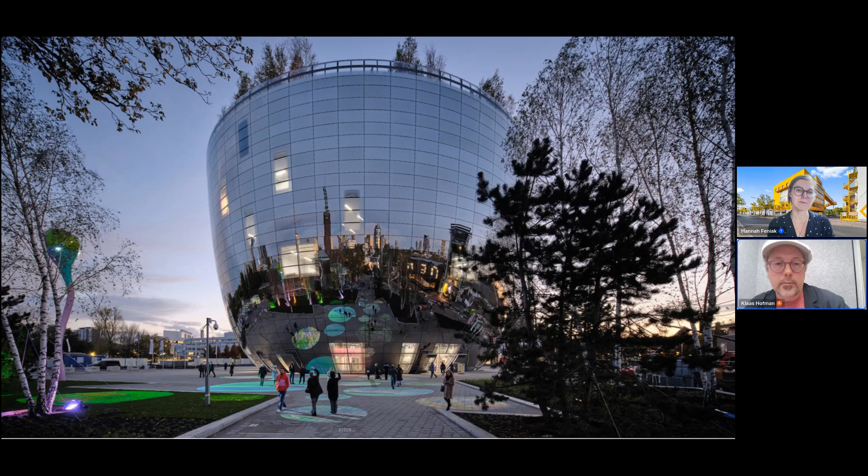We are quite well known, I would say, for our strong conceptual architectural projects, like this one, the Hanover Pavilion in Germany, the Market Hall in Rotterdam, the Depot, and Museum Boijmans Van Beuningen, a special type of museum that reinvents the typology of the museum, opening up its archive rather than its front of house. And Valley, a mixed-use building, bringing new life to a mostly monofunctional business district in Amsterdam.

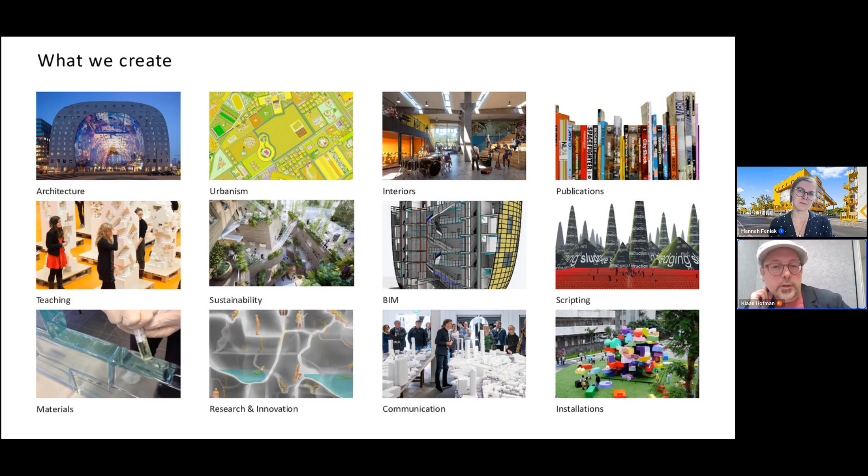But next to that, we do a lot of other things. We do a lot of urban projects, interior projects. We have a special interior team, and we do a lot of teaching and research, and have a lot of publications about that. And also, maybe not known to everybody, we more and more work with transformation of existing conditions. I would say it's been in the DNA of MVRDV since the beginning, since we started.

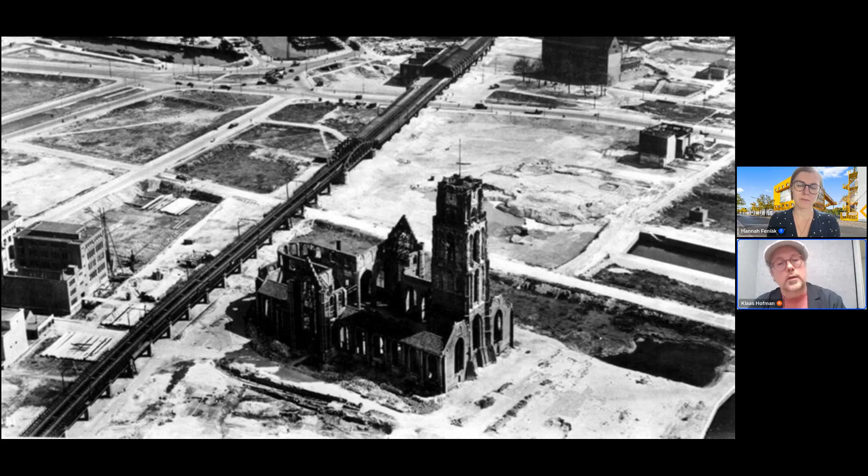Also because we're based in Rotterdam. This is an image of Rotterdam just after the war, which was completely flattened out by the bombings and the fire. So we know in Rotterdam the value of history, and the value of what you miss if you don't have this kind of historic sense of architecture in your center. And you appreciate somehow the value of monumentality of later periods. So we value our buildings from the 50s and the 60s, because that's how far our history goes back in terms of architecture. You can see it also in our office where we are housed.

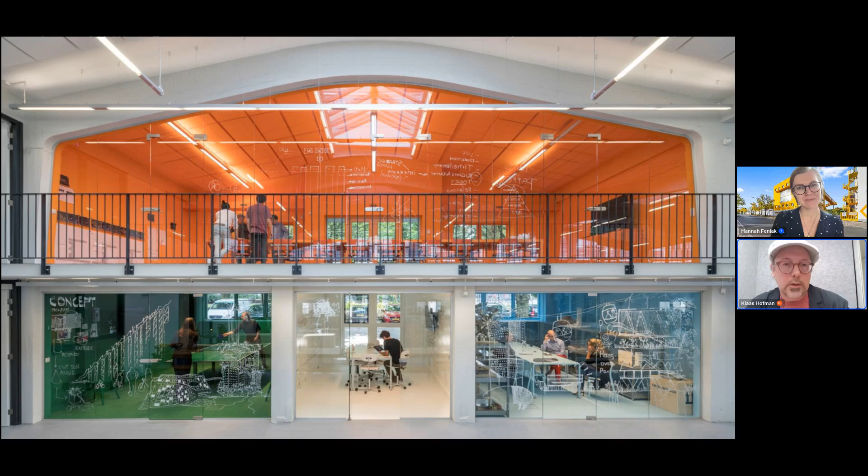This is one of those post-war buildings in Rotterdam that we have transformed into our own MVRDV house, customizing it and giving it a new identity that really fits us, but also strengthens somehow the quality of the building.

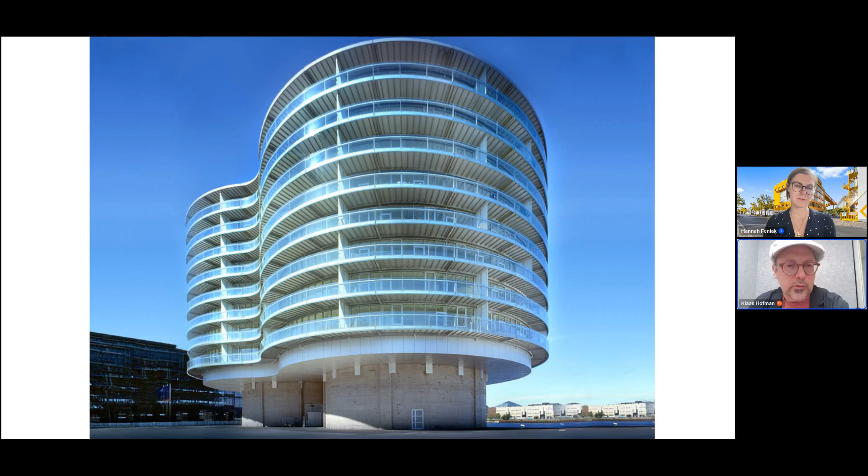We have transformed this monumental building into a hotel in Amsterdam. These silos have turned into beautiful apartments around the silos rather than inside, in Copenhagen. This is an addition to a family house in Rotterdam, building a new extension quite bluntly and with a lot of color on top.

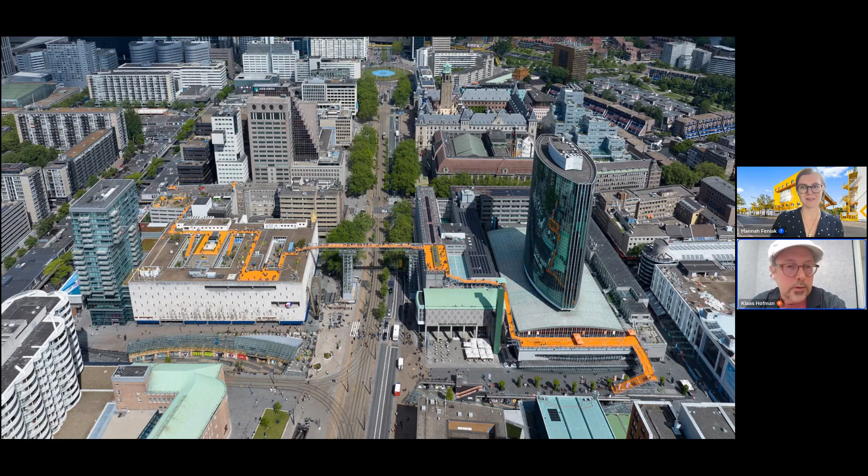And a few years later, we did a similar intervention somewhere else in Rotterdam, giving access to the roof with this designed pathway, and giving a completely new perspective on the city as we know it.

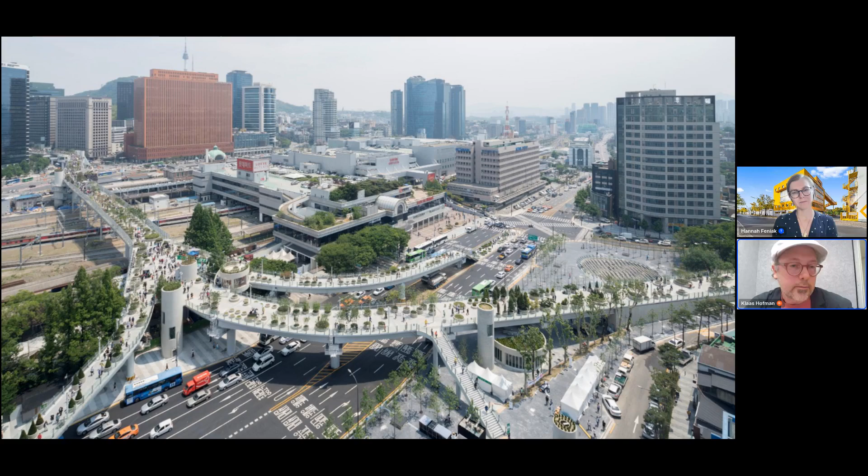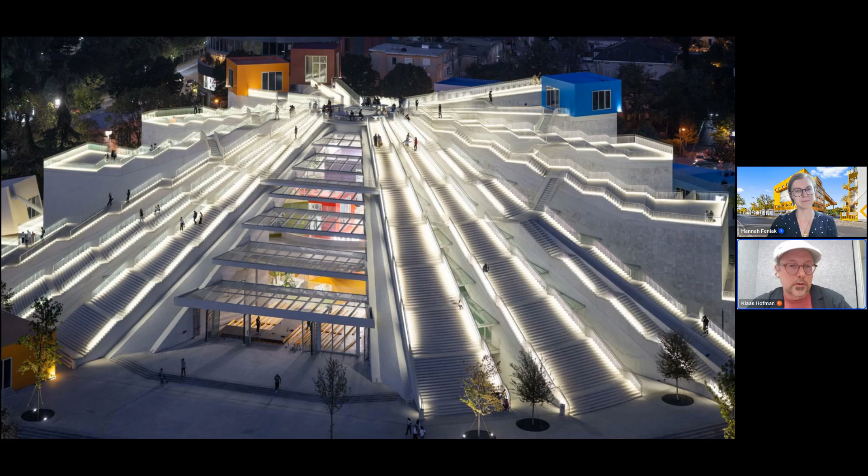We added new buildings in concrete factories, respecting the existing conditions there, but at the same time bringing new life. We transformed a highway in Seoul into a park, and the shopping mall turned into a beautiful public space. And a former communist monument in Tirana became a public educational facility which everybody was allowed to use and occupy again. And then I end up with Atelier Gardens.

As I said, many things come together here. We were invited by a client that wanted to transform a former film studio complex into a new campus for activists, to create a new community for institutions that are working to improve conditions in any field in the world. That sounds very vague. It has been quite a challenge to understand at one point what exactly the goal and the type of people and atmosphere they were looking for. But that was part of the whole process of a first urban regeneration investigation that we did.

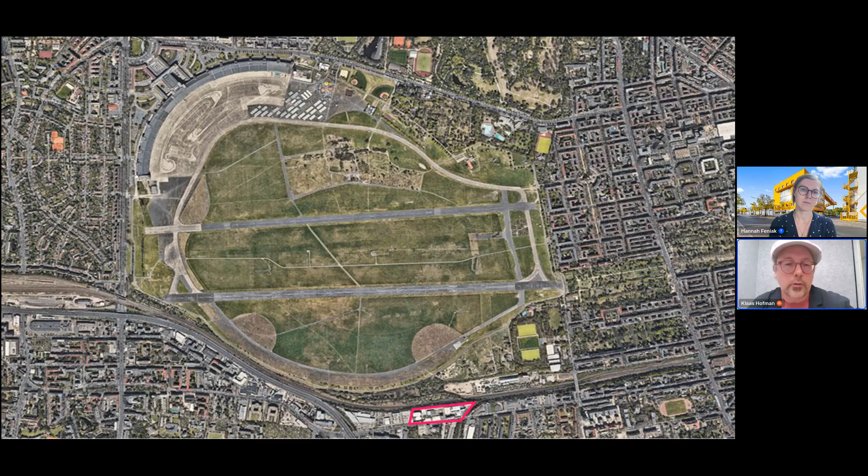You can see the site here below. When we started, the site was looking like this, quite a diverse collection of buildings. The brick buildings you see are very beautiful historic film studio buildings made out of brick. They are heritage protected, but there are many other buildings in between that had different qualities, and some of them were even quite ugly, I must say. You can see almost all of the site was paved, with so much paving and so many parked cars and vans needed for the operations of the film rental business. But transforming the uses of this site also allowed us to reconsider the use of the public space.

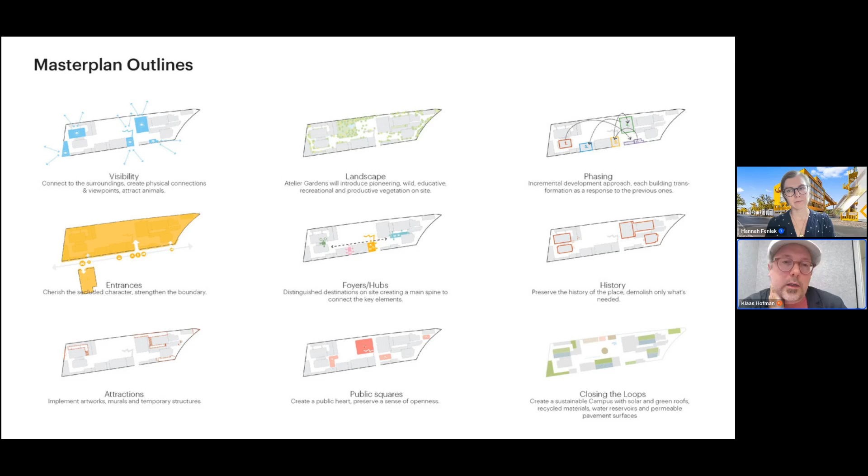We let a landscape designer hired afterwards, Harris Bugg from the UK, do a great job following the concept of step-by-step development and introducing rewilding ideas for all types of landscape that would creep into this campus, working with what's there, using materials that were available or would become available during the transformations to build a new landscape.

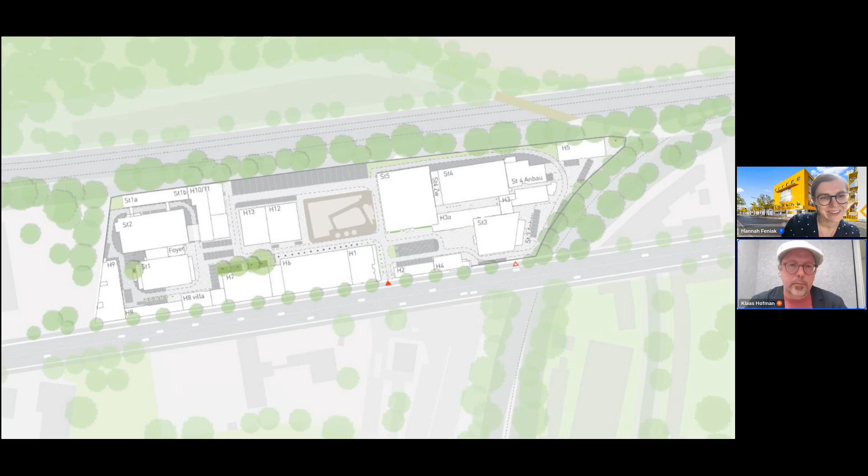So what we basically did here is transform this existing plan into a quite diverse and green landscape in which different types of buildings of different sizes and beauties would remain and get a new function. And this could all be developed step by step.

The client was able to pick which building they would be interested in developing first, then wait to see how that would go before moving on to the next one. And the public space would follow that idea.

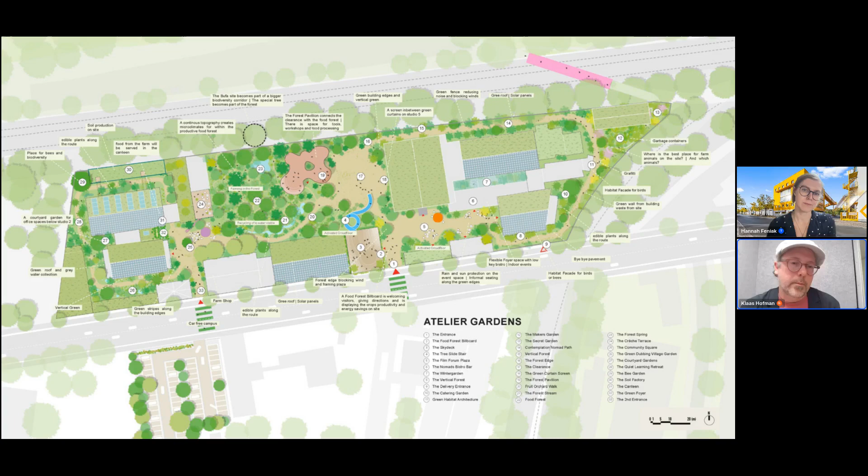So this, in our vision, would transform into something like this, which is still very diverse. It's more diverse, more green, also more colorful, as we always like to use color as an element of information, and maybe, to use your words, Hannah, joy.

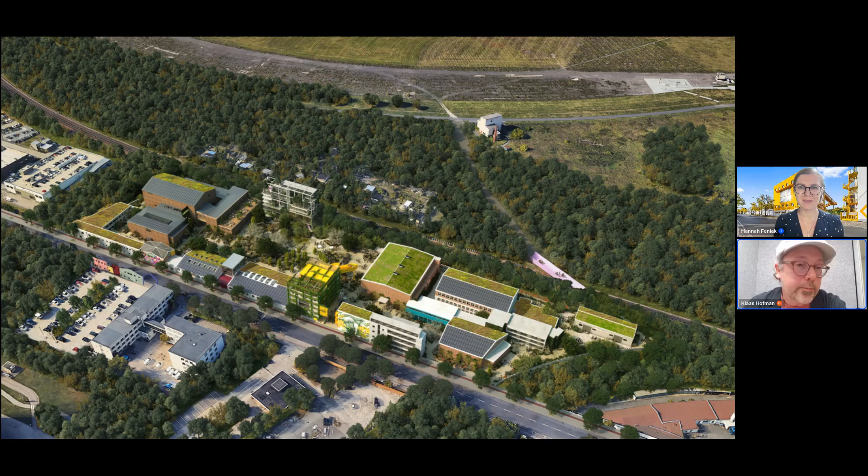This is one of the photos from already 2 years ago. I can never give you a final end result because the project is still ongoing - there might still be a new project popping up sooner or later. But here you can see what has already happened and what kind of dramatic transformation has been achieved in those 2-3 years since we started working on it.

To give this kind of freedom of development, and also this kind of chaos of scale and program, some structure, one of the principles for the entire master plan was to give the communal entrance points that already existed between the film studios - the colored blocks right here - a clearly recognizable identity in terms of color. So those would inform the color scheme of the surroundings, making it easy for people to navigate throughout the site to these different areas, each with their own types of users.

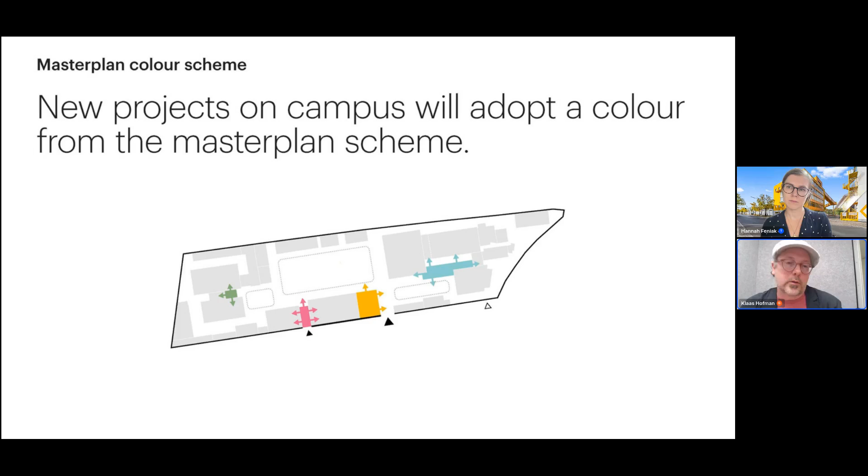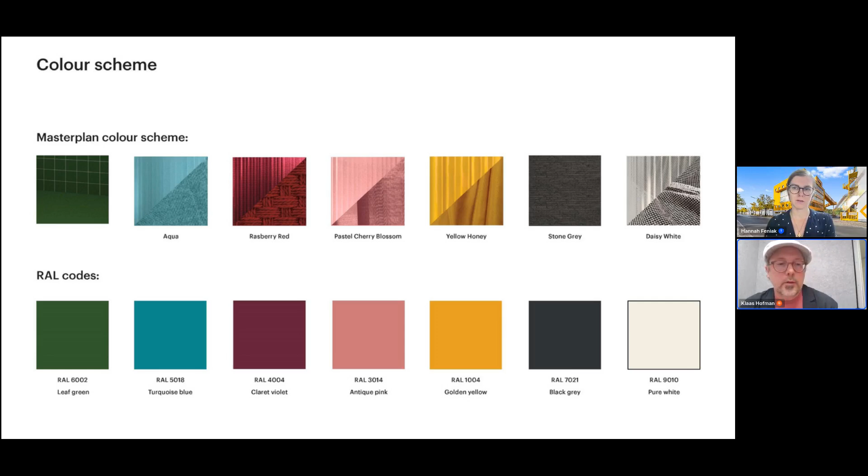And this color scheme - I'm going through it quite quickly and superficially - has been developed over time to reflect its quality for readability, but still have some connection to nature, to natural aspects.

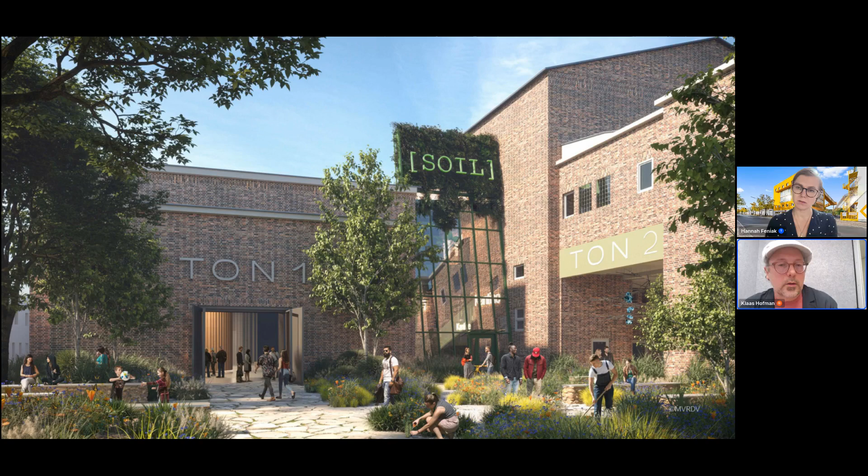This is a picture of the existing situation at the Ton 1 and Ton 2 corner, with this glass addition done in the 90s I believe, and our impression of what the transformation could achieve, including the transformation of the landscape, marking this kind of green entrance. I will talk about Ton 1 soon after, about what we did there.

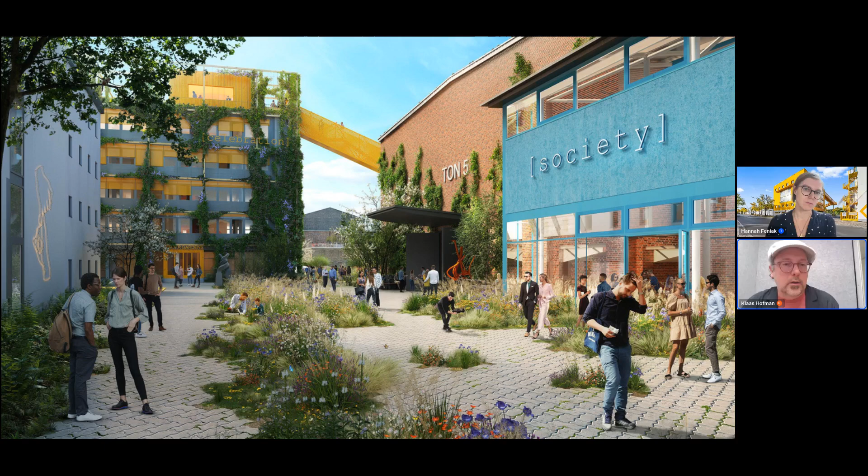That's the other side of the campus, with a lot of parking and a lot of pavement. You see house 1 here on the left, which we later transformed into the yellow house. So quite anonymous everything, and our vision for what it could look like in the end.

This is one of the projects, one of those other entrance buildings, that has not been realized yet - one of those examples of projects still in the pipeline that might still pop up one day, or if they're not needed anymore, maybe they will never happen. But we had a whole variety of mini projects in the pipeline to help the client achieve their goals.

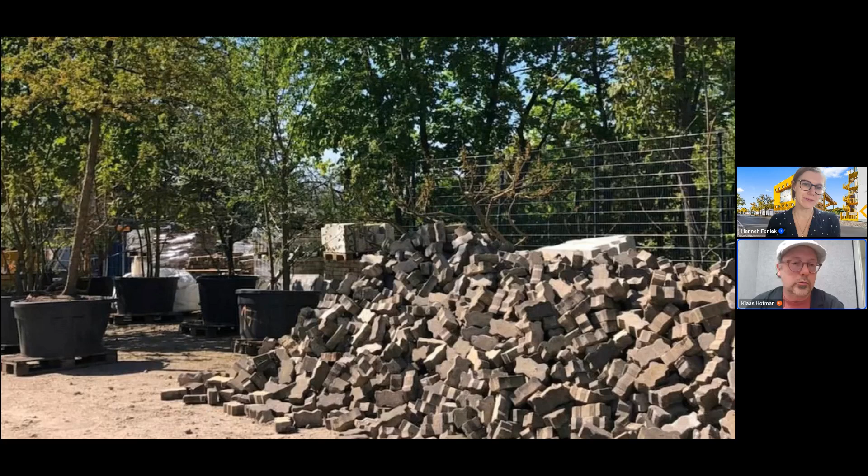Some pictures from soon after finishing this master planning phase show how the transformation quickly started before we began any of the architectural interventions. All the pavement that could be removed was soon piled up. This pavement is being pulverized and reused in the landscape as gravel or substrate for incoming plants. Some of the trees you see are already waiting to be planted.

Some more pictures - I don't have pictures of what it looks like now. I think this one is from 1 year ago, so I'm quite curious to see what it will look like next summer. Every year, nature will be more and more present.

At the same time, during this whole transformation, the operations of the campus and of Atelier Gardens continued as well. They are very active in programming spaces around the campus, organizing outdoor events, showing outdoor movies, organizing festivals, renting spaces out for commercials and filming, since filming is still one of the things happening on site in that studio building over there, Ton 5.

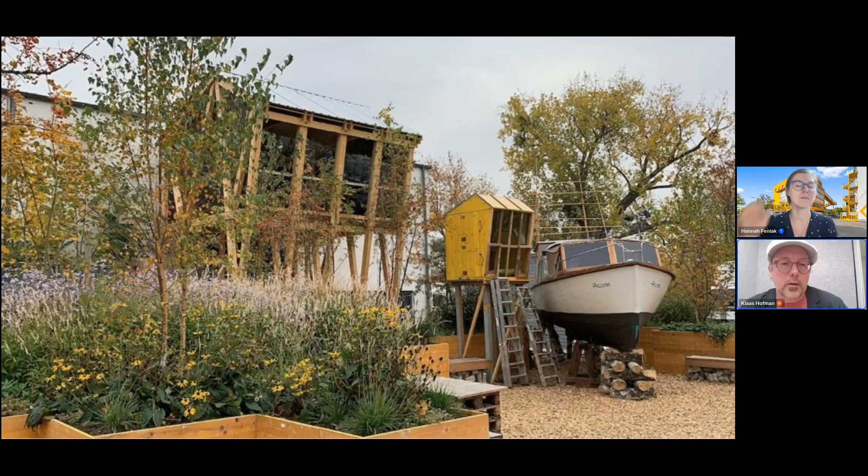Then I move on to—how am I doing on time?—the transformation of Ton 1. That's the first project, the first assignment where we could test our ideas on one of those monumental buildings.

We couldn't touch any of the exterior or any of the monumental value of the structure itself, but the client wished to be able to reuse that space in a much more flexible way, renting it out for different types of events, being more flexible in the types of tenants they could use.

The building was not suitable anymore for filming as a location, because the other Ton 5 was much bigger and much more equipped to do so. So we were kind of free to fill in potential uses for this building.

That led us to conclude quite quickly that we needed to separate this project into two main focus points. One important project is the renovation and restoration of this existing building, including redoing the installations, redoing the floor, all the things that were damaged and not functional anymore.

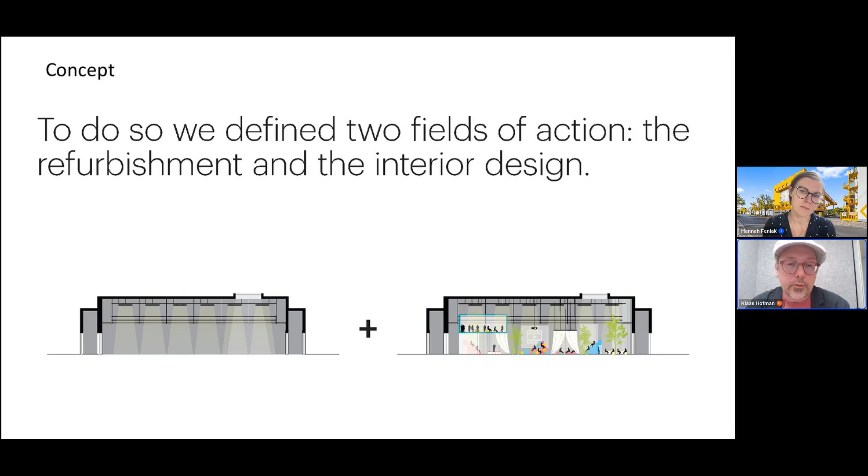But doing all of that in an invisible way, respecting the characteristics of the building as it was, and at the same time thinking about a way to occupy the space so that it would add something new, something useful and functional, that will allow the space to transform without touching the building.

So for this first project, we worked really closely with our local partner, HS Architects, Harold Hirschmüller-Schindler in Berlin. They helped us a lot on the technical work and on the monumental aspects.

And we broke the building down, so to speak, into these different ingredients. Each of those ingredients would get a proper investigation, and then a solution on how to deal with the restoration of it.

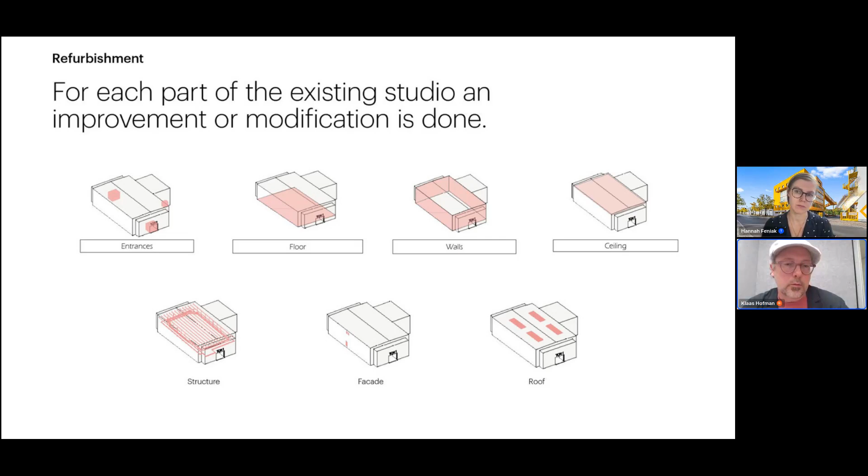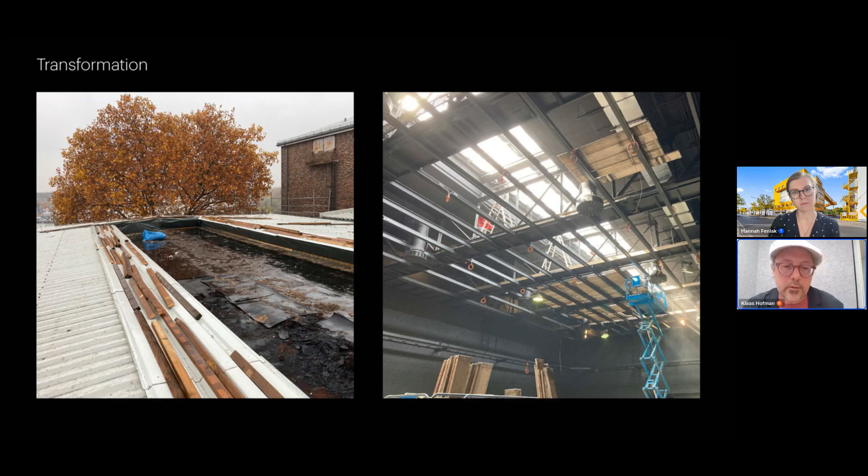It's quite an important thing now to also add daylight for the possible uses inside, not being limited only to the black box.

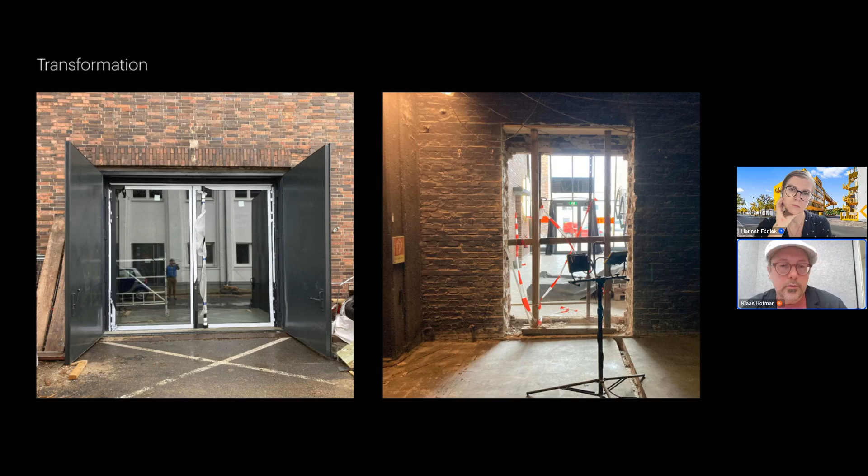We placed in new doors, as transparent as possible, and placed mirrors inside the entrance box so that daylight would be able to reflect even deeper into this space. We renewed the floor, but as you can see, most of the rest of the walls stayed intact and stayed raw and rough as we found it.

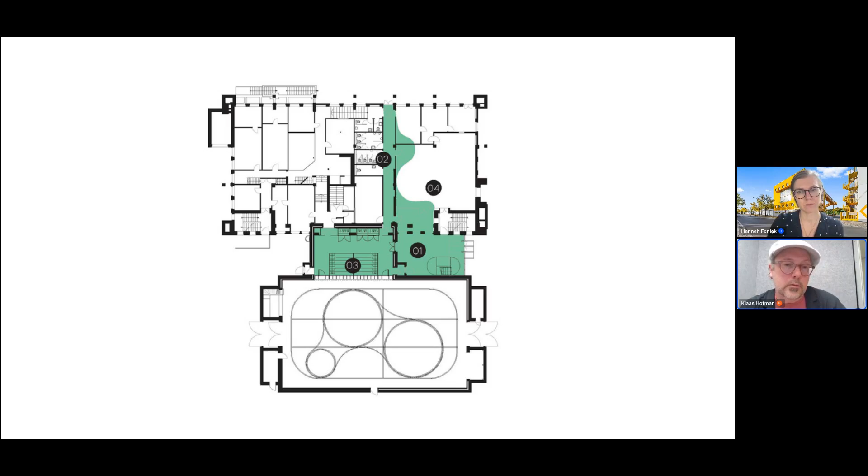Then, to anticipate the potential uses of this space, we also had to think about the facilities that would be needed—additional spaces next to it that could be transformed, like toilets, the canteen, the wardrobe and storage, etc.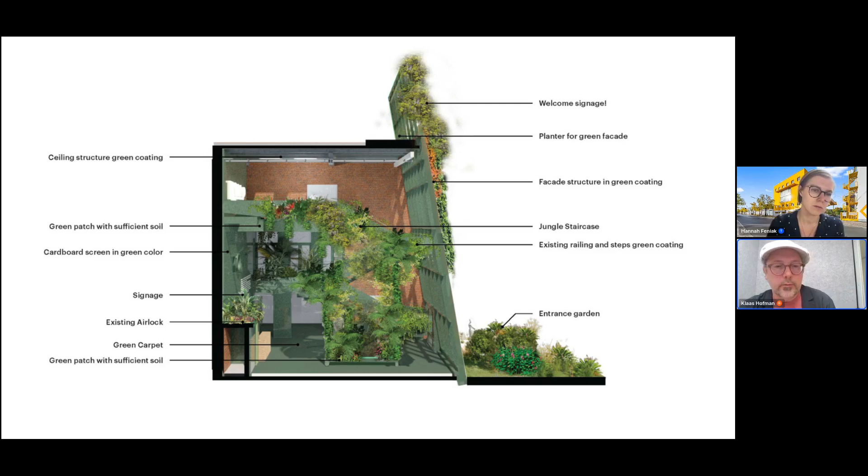And this was done in this green area, and this is then the extension of that idea of turning this entrance marker into a kind of information meeting point, using that color also to mark the communal spaces that would facilitate the studio building.

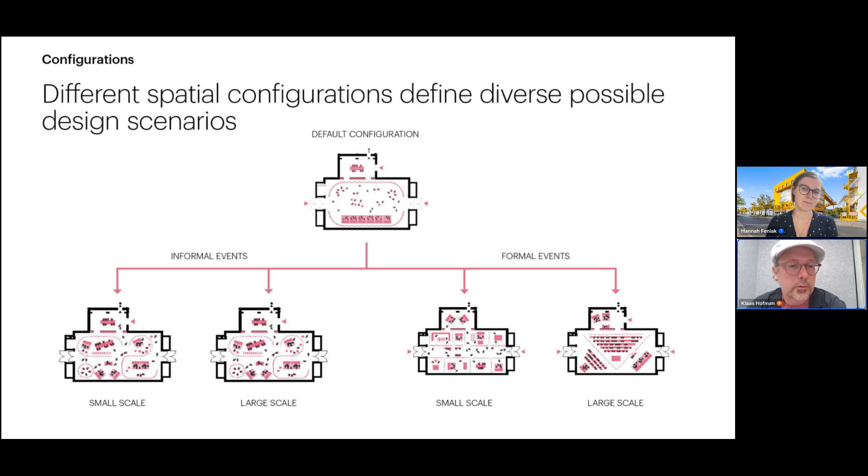Moving on to what to do with the building—a flexible concept for different uses of this film studio space—we came up with the idea to design a massive rail structure that would hang in the space as a proud, visible element, not something purely functional hidden somewhere in the ceiling, but more like a spaceship.

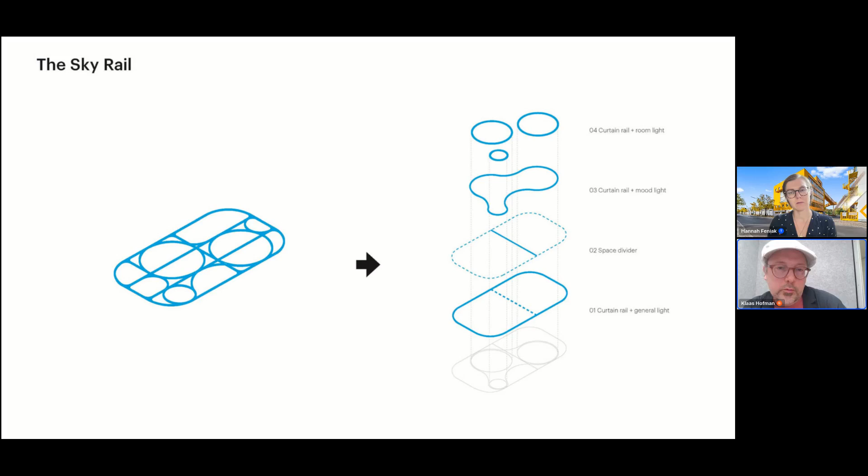It would be multifunctional, also integrating light and multiple trajectories where curtains would then be able to divide the space in many different ways.

These are some of the renders we used to convince the client of this idea. You can see the blue rail system with all the curtains in different colors, able to make different rooms in different colors, parked on the sides.

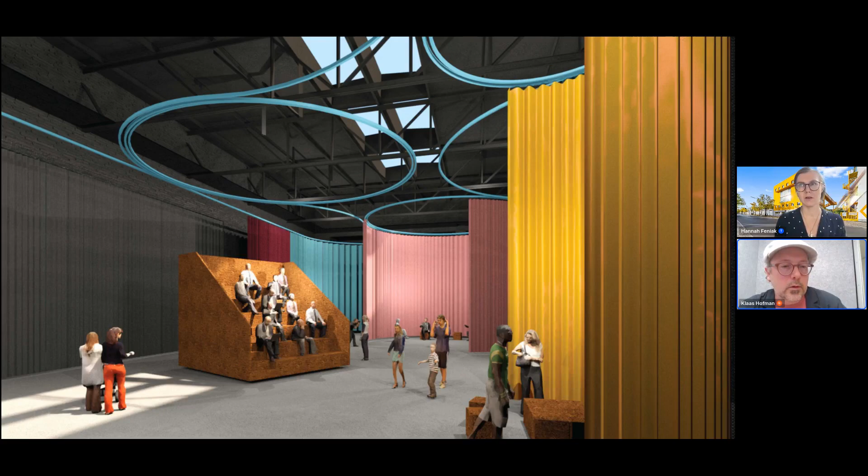So you can use the big space in its most bare form, but as soon as you start to move the curtains, you're free to divide the space any way you want—into smaller spaces, with multiple uses at the same time, because some of the curtains are also fully acoustic.

Using the additional green space next to it to make the space bigger, introducing these kind of tribunes and moving furniture to be able to have audiences move around.

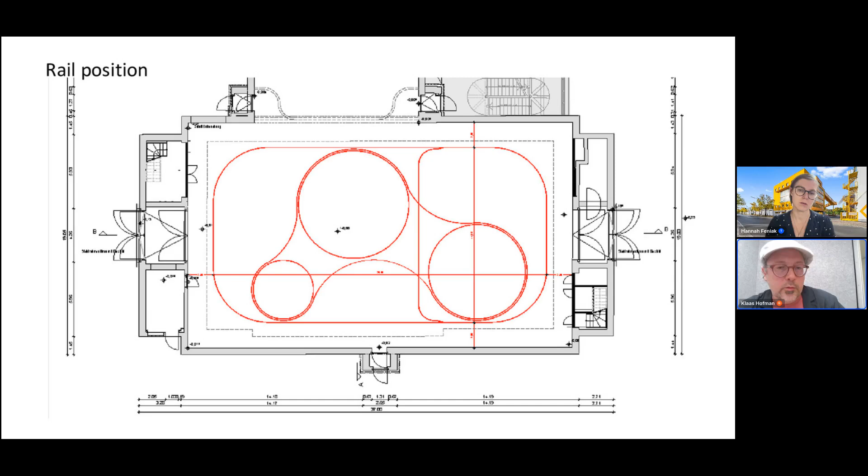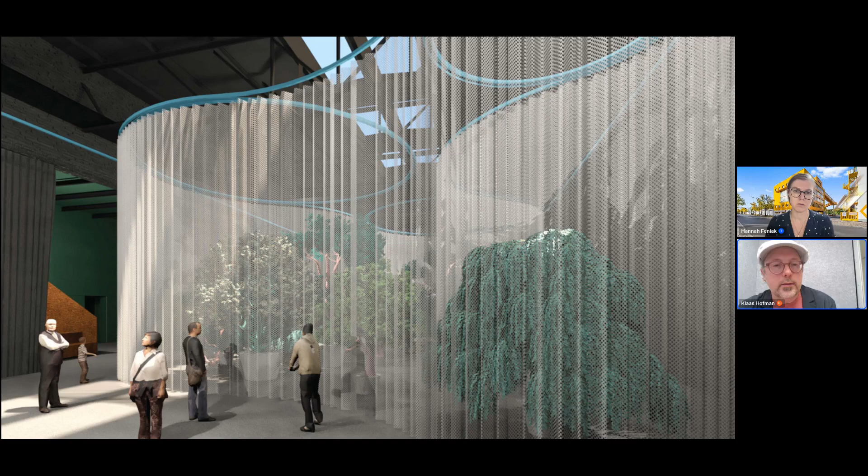And the curtains, as you can see, each would have a different property, from being very thick and with the best acoustic value to being very transparent and lightweight, to not close off too much.

And these are the photos. This is a picture of the rail with the light and the skylight above, and the beauty of this kind of minimum intervention that allows so many different atmospheres inside. The different textures and fabrics that we used, and every day a possible different intervention that would fit the type of events.

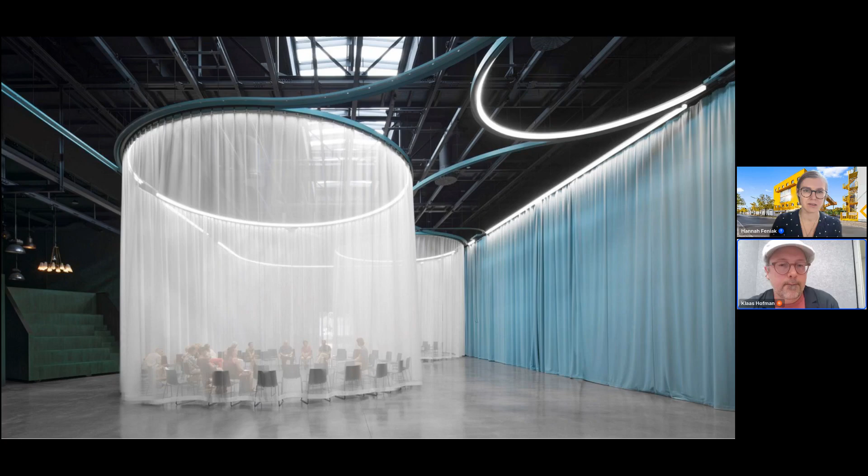The client wanted to rent this out as office space, but it would not apply for proper use anymore, because the facade was an issue, the climate system was not good enough, and the building was overheated in the summer. It was completely filled in with office cells and ugly lowered ceilings, and it needed a complete makeover.

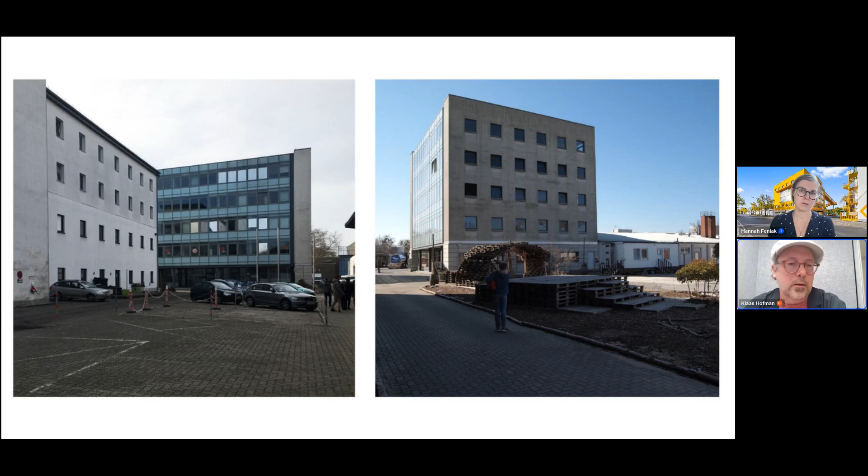So again, we investigated all the different ingredients of the building and different parts that would be able to improve those different aspects. The facades on south and west would somehow need to improve the overheating, and the roof, by the way.

Some of the facades really needed to build a new identity for this building, because at the same time it would be standing next to the main entrance, and the client was desiring some kind of iconic statement to invite people into the campus, which is quite enclosed. I didn't mention yet that there's a wall around the whole site, which is also one of its qualities, that it feels quite intimate once you step inside, but you need to make some effort to let people know that they can come in. So this building, that was one of the goals for this building, to be able to do that.

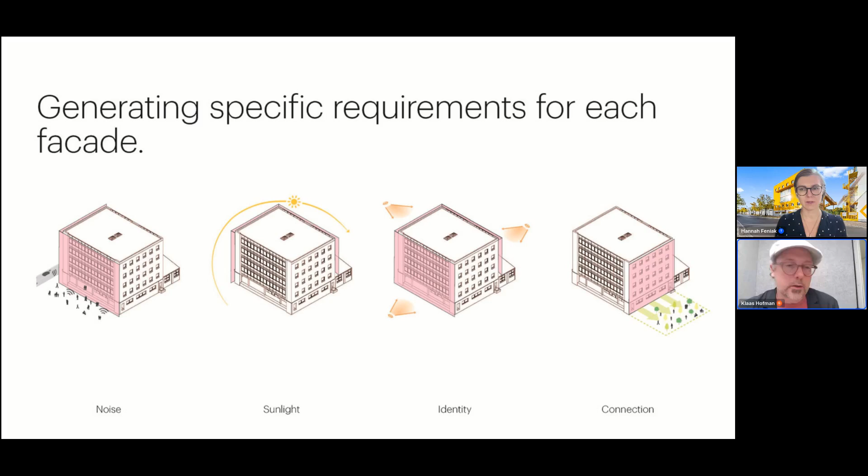At the same time, on the right, this building was also quite enclosed towards the interior of the campus, and the client wanted to have more public programming on the ground floor that would be able to open up to the future garden. So we came up with the idea to find a solution for all of these aspects in kind of local interventions in this building and on this building.

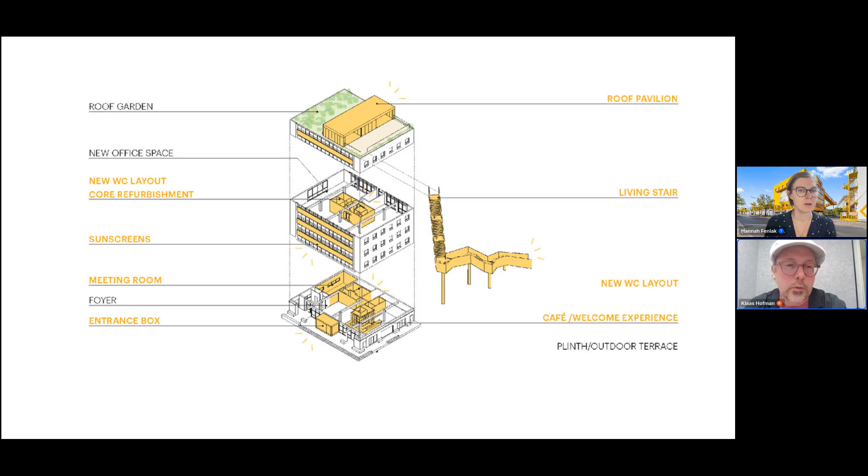And give all those new elements a yellow color, part of that color scheme I mentioned earlier. So a new core with a new elevator that would be able to go to the roof would all be yellow. The ground floor with the new meeting spaces and the cafe would be yellow, and a new rooftop pavilion to function as a kind of more public event space overlooking the whole Tempelhofer field and looking at the skyline of Berlin, as you will see later. And the roof garden, sitting in a roof garden, would insulate the roof.

And then, because of the amount of people that would be allowed on the roof, it required an extra fire escape. We came up with this idea of this quite expressive external staircase that would not just be a fire escape, but would function as a kind of public attraction point as well. I will come back to that later.

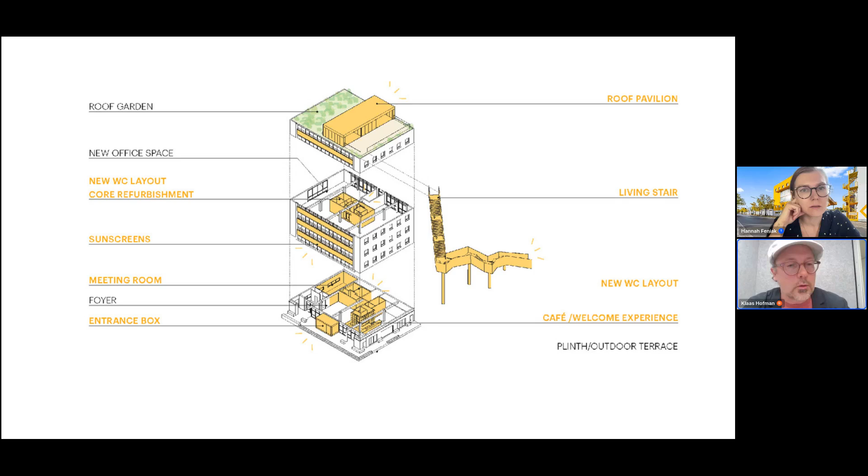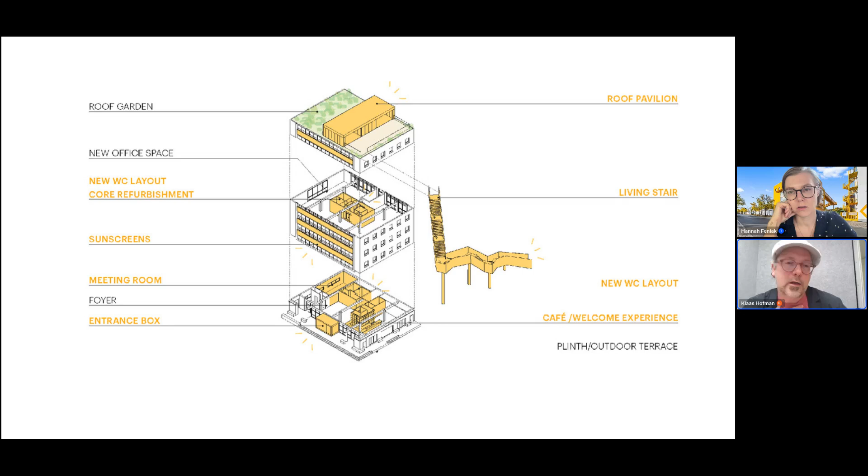This idea, I must be honest, of having quite a strong contrast between the existing building remaining as it is and giving a yellow color to all the new elements, was kind of doubted by the client—if that would be strong enough, or maybe the building would still look ugly. That led us, finally, quite shortly before construction, to decide that actually the whole building would be painted yellow.

Maybe that can be some of your comments, to see if you agree with that decision. So this is the result. It makes it quite uniform in that sense, so that's a good thing about it, I think.

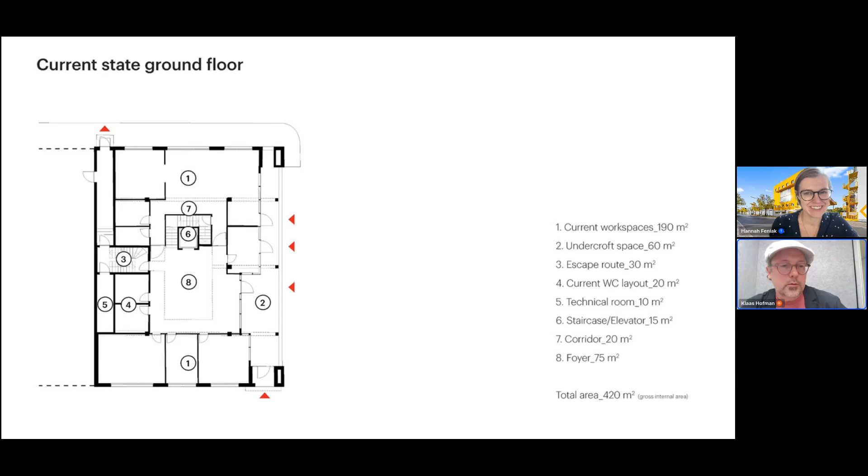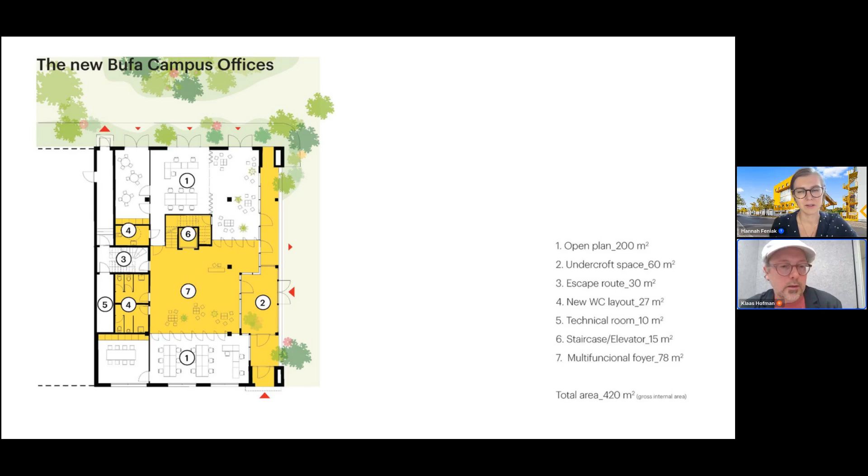This is the ground floor as it was, and our proposal was to strip everything away that was not functional or not needed anymore, and then give it a new purpose with new functions, in terms of a cafe and meetings, co-working spaces.

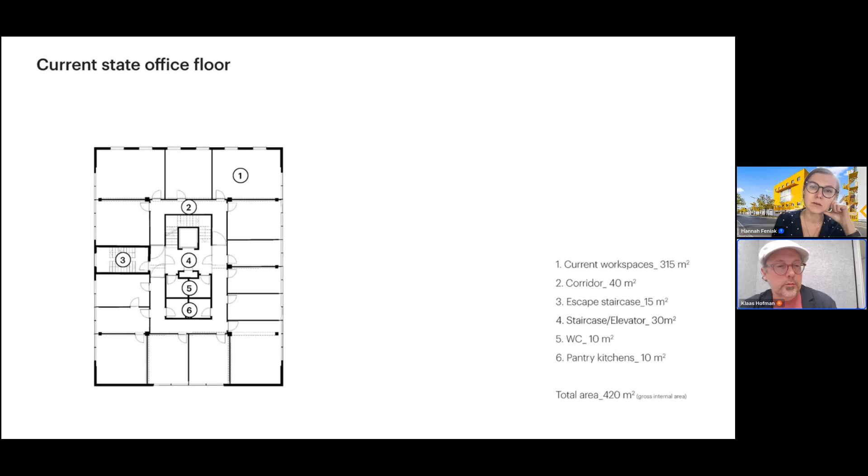upper office floors that used to look like this, stripping them out completely and giving the tenants the opportunity to decide how much square meters they would need and how they would want the space to be divided up.

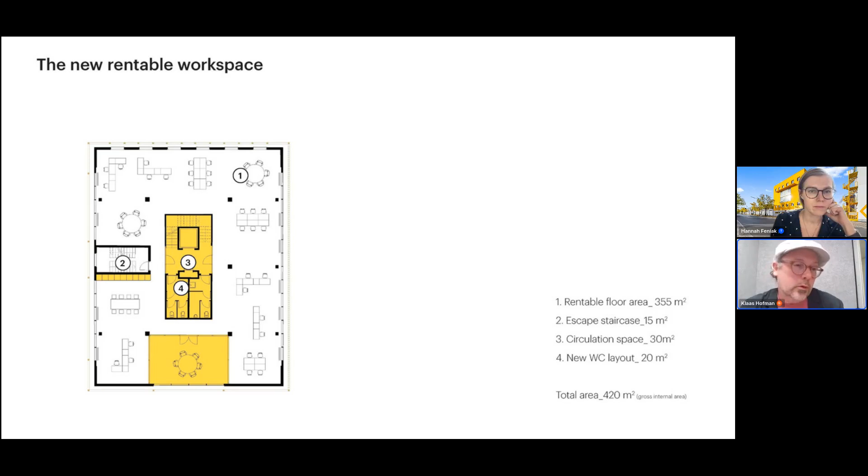And our local architect, HS Architect, for example, is one of the new tenants of this building. You can see them here.

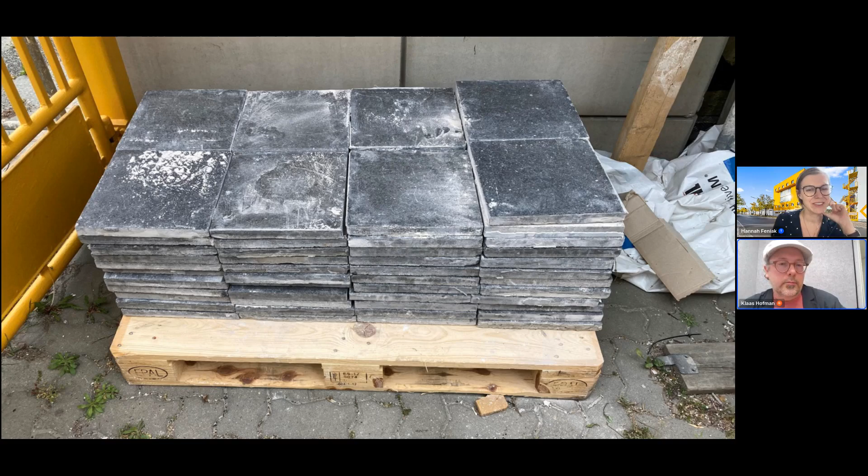All of the materials that somehow had to be removed from the building have been collected, labeled, and reused elsewhere on site. Some of these insulation materials have been used somewhere else. These tiles have been pulverized as well to be used in the landscape, etc.

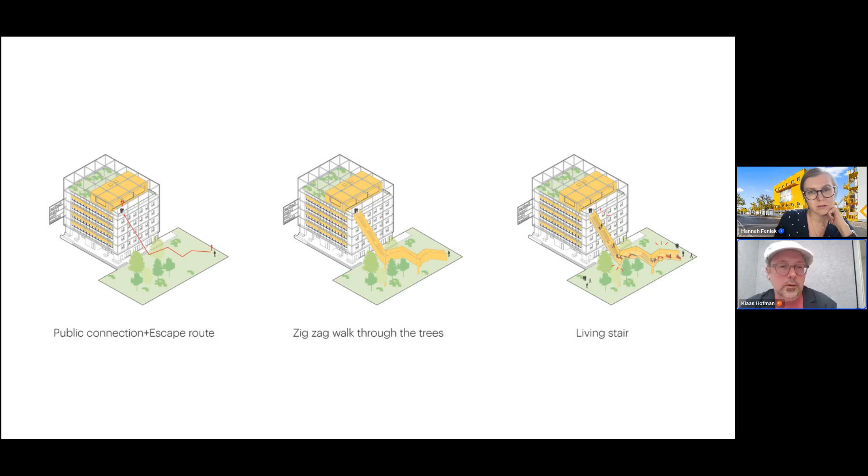And then I come to this additional idea - there's quite a modest transformation of the building itself, but since this is the highest building on site, we thought it was a missed opportunity to not somehow occupy or be able to access the rooftop. So it was not accessible before, and we convinced the client to let the public be able to enjoy this beautiful view. So we proposed this pavilion on top, sitting in this roof garden, and added this staircase.

This allowed the rooftop to become a public destination without interfering with the internal logistics of the building.

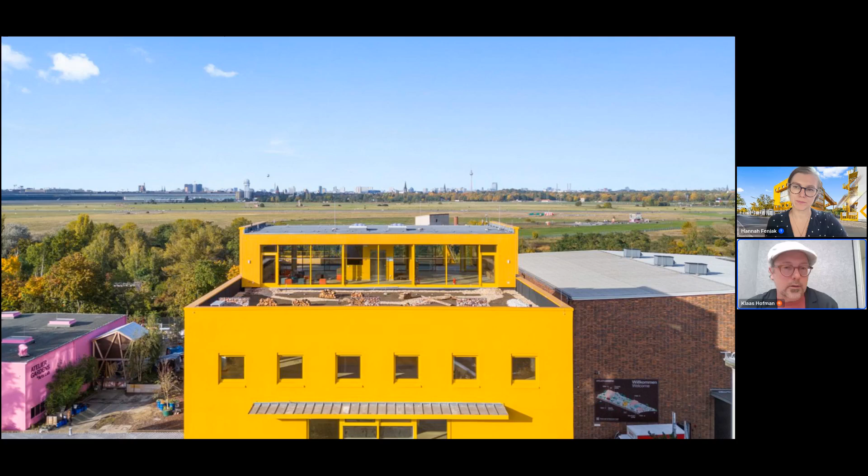The garden, of course, is not there yet, still has to grow, but I think it will be beautiful. But you can see this amazing view that you have from this pavilion.

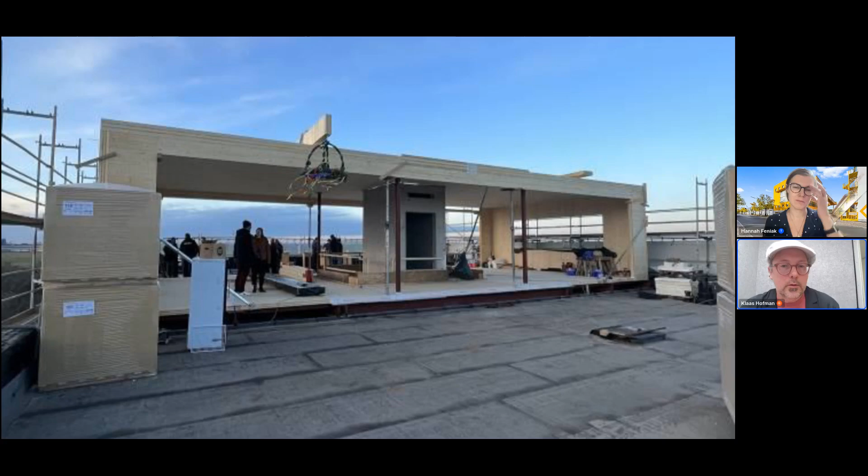And the terrace in front of it, overlooking the Tempelhofer field. This is where you end up when you climb the stairs.

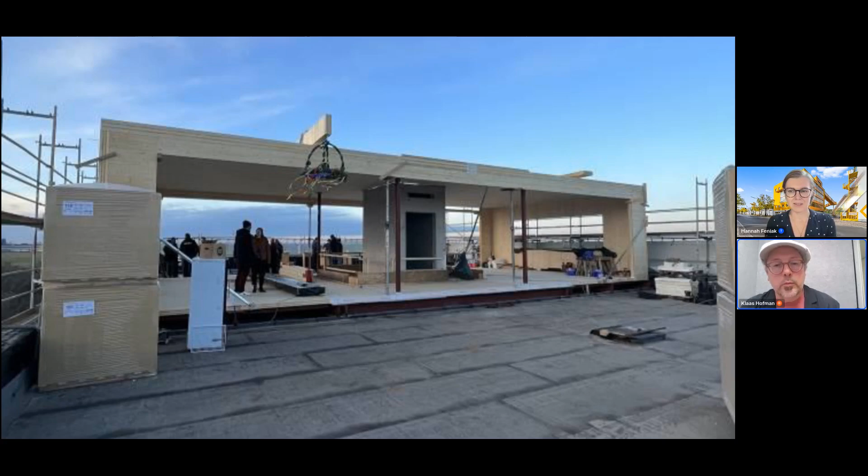A picture of the completely prefabricated CLT structure of the pavilion, lightweight. We were able to build it on top of the existing structure without any reinforcements.

And the facade of this pavilion is able to open up completely to also have a connection between inside and outside.

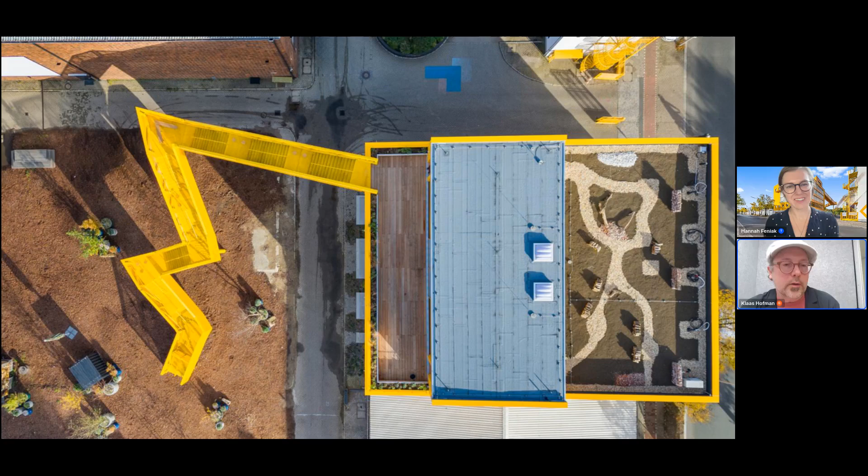And then this zigzag staircase, as we call it, became quite an expressive element in the end. Something the client was looking for - not only to fulfill its functional purpose as a fire escape, but to also create this iconic piece of furniture landing in the middle of this future public space that is developing around it.

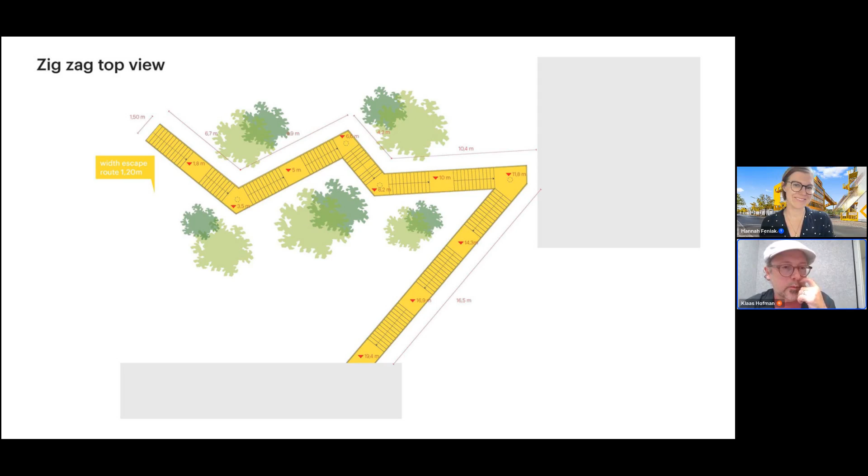We used the minimum dimensions needed for the fire escape, and we extended the width as much as possible to give more space for people to sit.

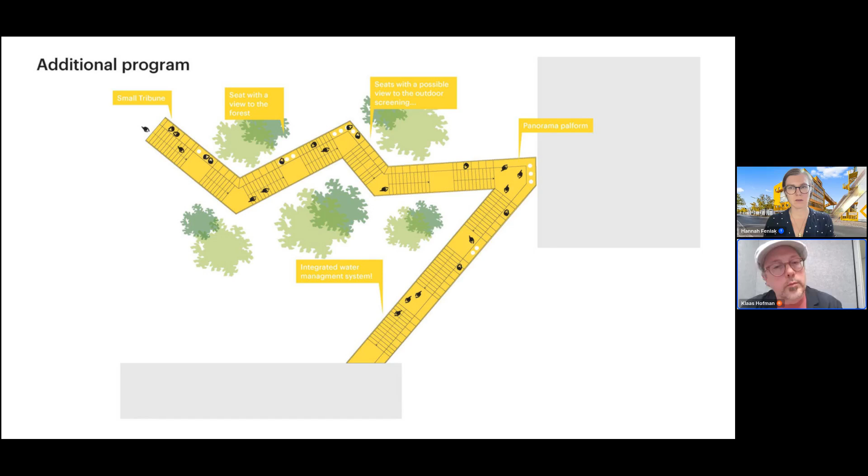We added a couple of small chairs and tables here and there, so people would actually be able to not use it only for going up and down, but also to sit and meet and relax.

You cannot see it now, but the idea is that this staircase will really meander through the different trees, so that when they are grown up, you really sink into this small forest somehow surrounding the staircase as you descend.

Some people already found their favorite lunch spot.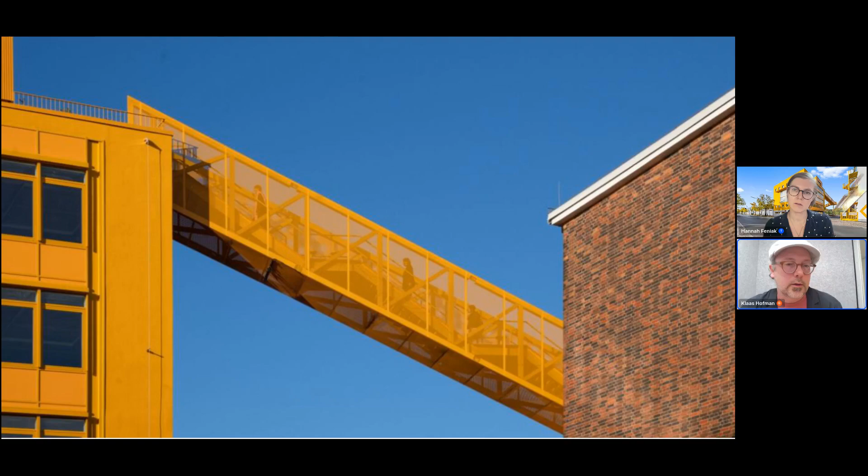And in the evening it's illuminated, giving quite a nice, unexpected effect of the reflection of the shadows of the perforations on the facade itself.

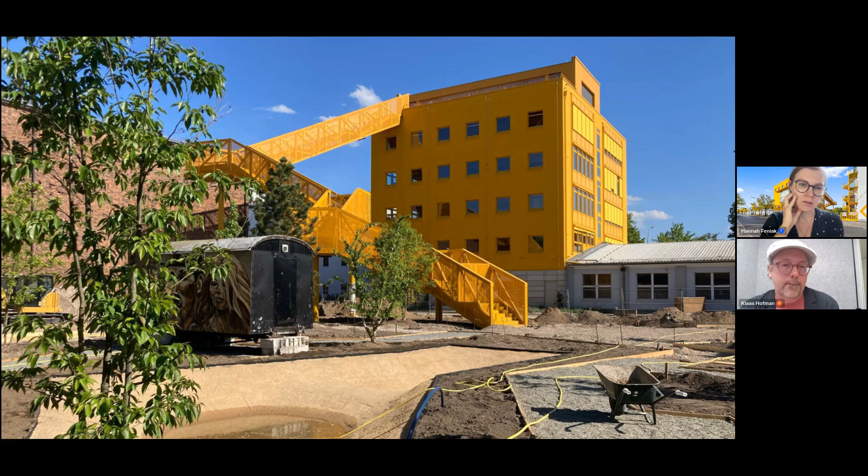And here you can see one of the latest pictures of how the landscape designers are starting to construct the landscape around it.

I think this is what I wanted to show you. Thank you for your attention.

Thank you so much, Klaas, for all of this, for sharing all of the details about the project, but even going back to situating us within the firm's work. It was incredibly insightful to go through it step by step. And for the record, the chat all agreed that it was a great decision to paint the entire exterior.

To get our question and answer period started, I have my own quick question, which came up from the way you were describing using color as a signpost. I was really struck by the different colors of material on the interior project you showed. I'm curious, when you select colors, what does that process look like - do you already have preset ideas of what you want to signpost by choosing a specific color, or is it very specific to the site and context, what a color might feel or represent?